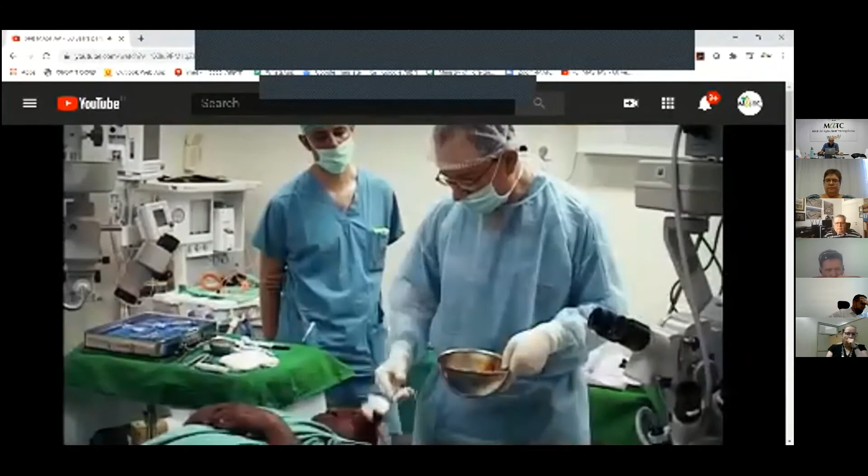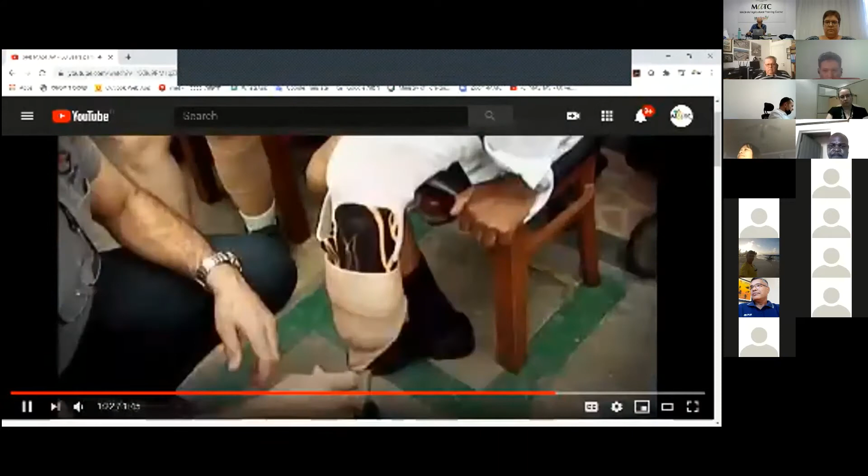Mashav, Israel's Agency for International Development Cooperation, was launched 60 years ago to share the know-how and technologies which provided the basis for Israel's own rapid development. Mashav aims to empower those living in poverty in a holistic and innovative way and support fellow nations and communities in their struggle to achieve sustainable development, placing people at the heart of its initiatives. Our agricultural programs use unique techniques and farming methods to increase sustainability, food security, and hunger eradication. We believe that investment in education is an investment in our future and an agent for change around the world. We coordinate Israel's official humanitarian assistance, building medical facilities and supplying medicine in the wake of earthquakes, floods, famine, and other disasters. Mashav promotes innovative entrepreneurship as a means of advancing growth and prosperity. We believe that gender equality and women's empowerment are central to reach sustainable development. Our philosophy is to leave no one behind. During 6 decades, Mashav has trained over 300,000 people from more than 140 countries and has established development projects worldwide. Mashav, Israel's Agency for International Development Cooperation, is celebrating 60 years of sharing its experience and partnering for a better world.

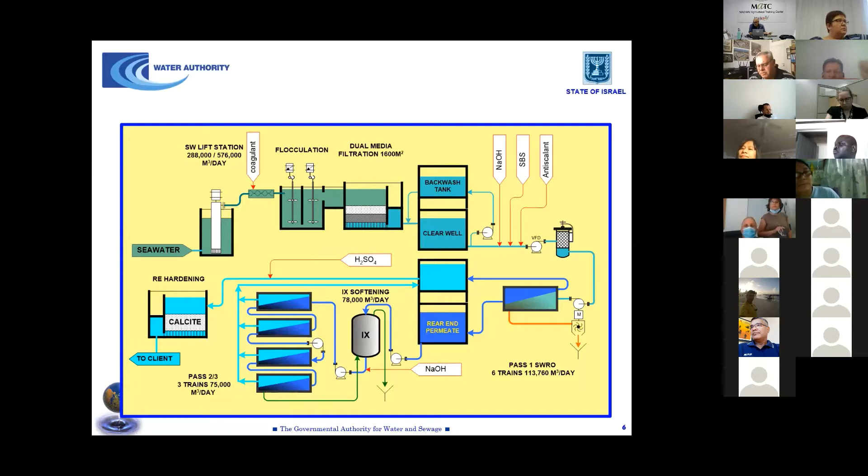Now, what are we doing? We are doing three things in parallel. The first thing is saving water, and I will touch on different kinds of water saving that we are doing in Israel. The second thing, we are reusing water. We are taking our municipal wastewater and using it as a water resource. And this water resource is a constant resource. We have it all year long, and it's only growing with the growth of population.

And the third thing that we are doing is desalination. It means producing new sources of water from resources that you cannot use directly, and you need to do all kinds of purification in order to get the molecules of water that we need.

So going into the water saving, there are several things that we are doing in this matter. One thing is publications, all kinds of PR, all kinds of promotions in TV, radio, newspapers. This is a thing that we are doing all the time, letting our people know that we will always have a shortage of water and we need to save water all the time.

The second thing that we are doing, we are teaching the children in our schools. We start with our kindergarten children, elementary school children, but we are doing also a lot of work with our students. It means all the pupils in Israel are getting a kind of a brainwashing on the water issue, trying to teach them really to save water.

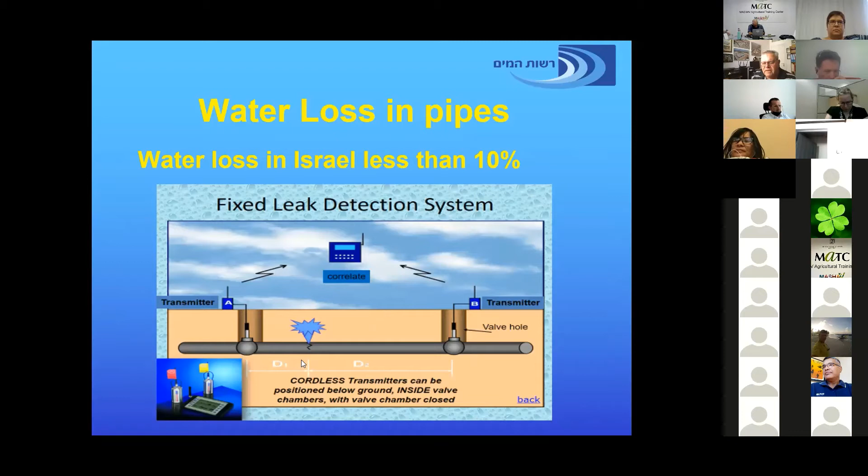The way that we try to define the leakage in pipes, there are very interesting technologies, part of them developed by Israeli companies, in order to define the leakage immediately when it happens. It means that you are able to correct, to maintain the piping system immediately when you have a leakage and save a huge amount of water.

And about the water tariff, this is a very important thing. What is important with the water tariffs: in Israel, we are using two levels of water tariff. We are using a lower level for the poor people that cannot afford to pay too much for the water, and we are using a higher level for the people that have more than enough money in order to pay for the water. So the whole matter of the water tariff is, again, very important.

And the prices in Israel today are about $2 per cubic meter, up to $3 per cubic meter, and the agriculture is paying for their reused water about $0.4, $0.5 per cubic meter.

Now, going into water reuse. Water reuse is very important in Israel. We started with it almost 30, 40 years ago, when we understood that we are not going to have enough natural water for our purposes. And on the other end, we do have municipal wastewater that we can use. So we started to treat the wastewater and reuse it in our agriculture. This started with an amount of about 100 million cubic meters about 30, 40 years ago.

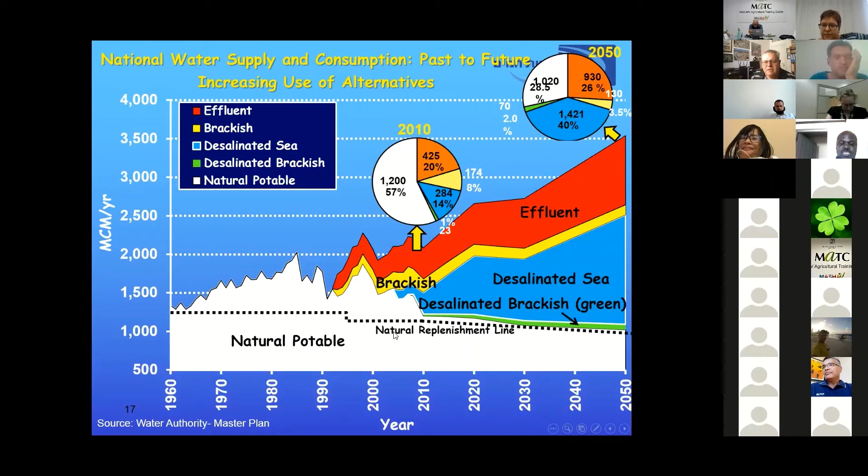Now, by being a country that has a huge deficit of water, we also developed very interesting technology in Israel. I'll not go too much into it, but if you are looking into water saving systems, water leakage detections, water security, which is very important, smart cities, and national water management, a lot of technology like this we do in Israeli companies, and they will be more than willing to assist each and every one of you with this

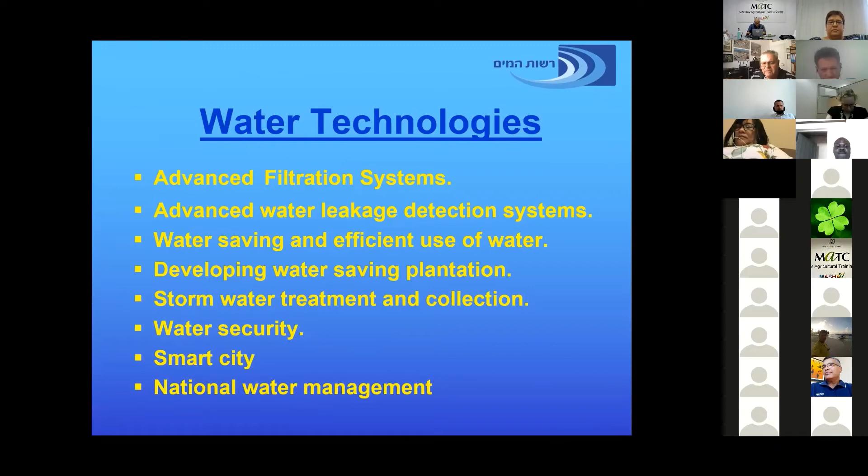matter. Now, after we talked about water saving, we talked about water reuse, we are going now to deal with the last part of the presentation, which is producing new means of water, and it's called desalination. And for desalination in Israel, we base ourselves on two resources. One is brackish water or aquifer water that we have, underground water, salty water that we cannot use directly, and we need to desalinate it to take out the salt from the molecules of water. And the main resource is seawater, and the desalination of seawater is our main resource of desalination in Israel.

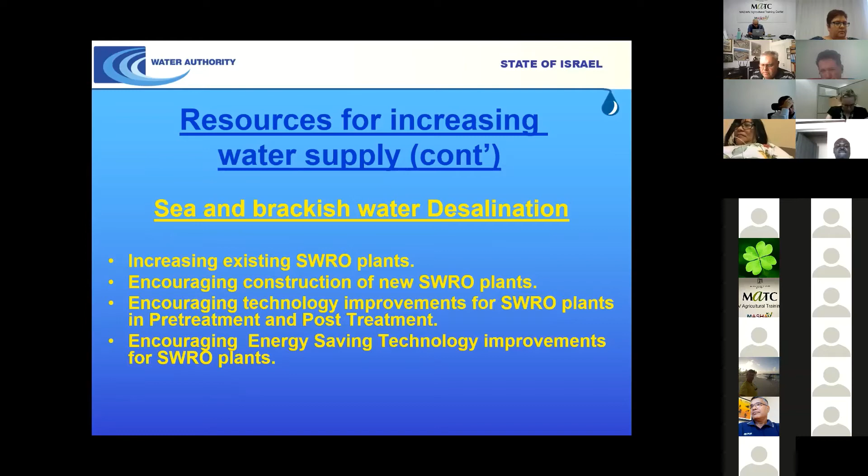To be able to desalinate water, we need to have a national program that will let us keep land for new developments of desalination plants into the future. And we do have a national master plan. The old one was a master plan that allowed us to desalinate up to almost 800 million cubic meters per year. Just a few years ago we finalized a new master plan that allows us to desalinate more than 2 billion cubic meters per year. It means allocating new places for new desalination plants. So this is a very important thing that we need to have in each and every country that goes into desalination, to define the places that you want to have desalination in the future.

I will just say one word. The price of desalination in the world is going down. If, let's say, 20 years ago the price of desalination was about $2 per cubic meter, we succeeded now in Israel to reach numbers of almost 50 cents, almost $0.50 per cubic meter of desalinated water. And it means that we are now very close to the price of just producing natural water. So desalination is not as expensive as it used to be, and we can allow ourselves to have desalination in most of the countries in the world now. So this is very important to know.

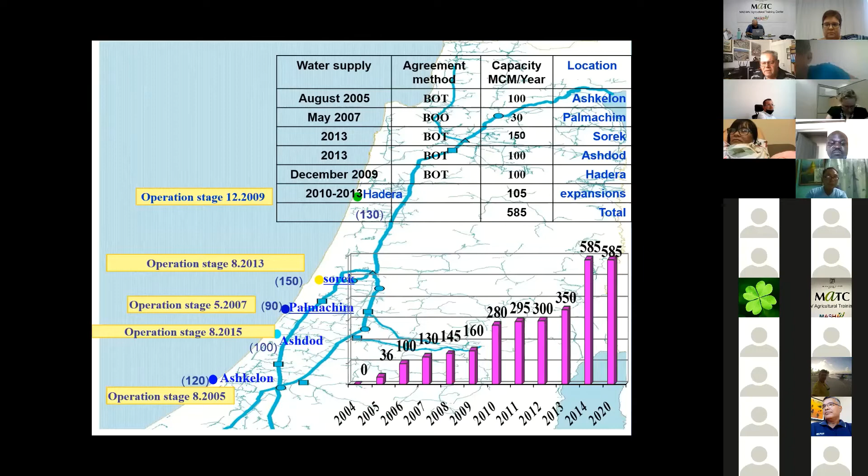Now, just a word, as I promised you, about the technology. The reverse osmosis technology, which is called the new technology, is about 50 years old. It started with a Jewish professor who started his research in California, Professor Sidney Loeb. He's really the father of this technology. He also gave the name reverse osmosis to this technology. Professor Sidney Loeb came to Israel as a new immigrant in the late 60s, and I was fortunate to be one of his first students in Israel with this really new technology. Today most of the desalination in the world is reverse osmosis, because this technology is cheaper than the old thermal technology.

Now, going back, after we desalinate the water, we need to send the water everywhere in Israel. So we do have a national grid. You can see these blue lines, like blood veins all over Israel. It means that we can send water from each and every place to each and every place in Israel. You can also see some red lines, and this is the piping system of the reused water in Israel. So we have a huge piping system of natural and reused water all over Israel.

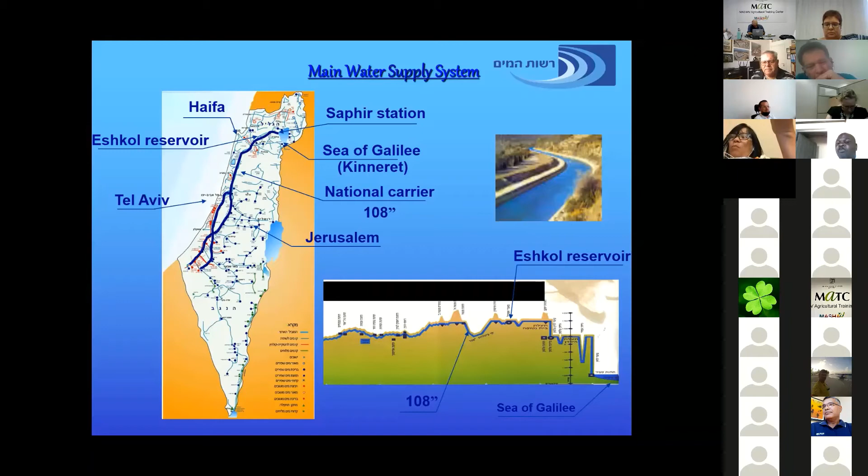You also need energy. In order to build and produce more desalination plants and more wastewater treatment plants, we need energy. And Israel is basing most of its growing energy on new and sustainable units. Part of it is using more and more natural gas units, going into solar energy. We just finished our third large-scale solar power plant in the desert. We are going to build much more wind energy in Israel than what we have. We also have what is called pumped storage. I'm not going into it, but most of the increase of energy in Israel is going to be sustainable means of energy.

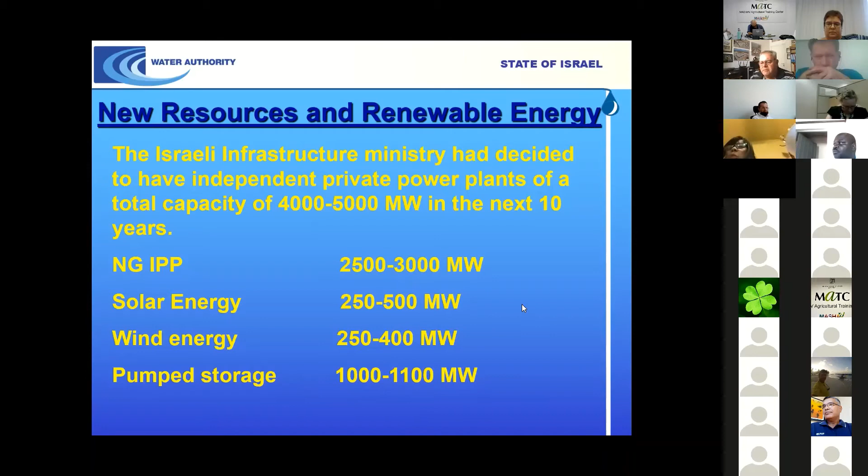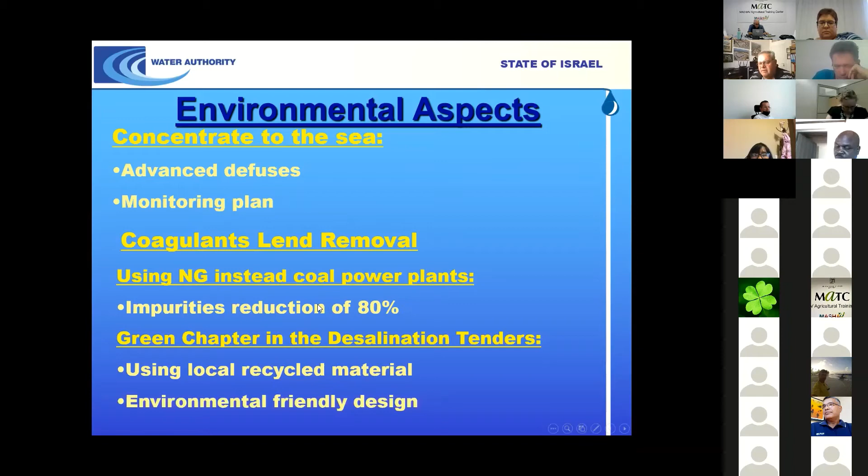And just going on to the environment, of course, when you are building so many desalination plants, you need to keep the environment as happy as possible. So we need to bring down the influence of these plants on the environment. We are doing many things in this matter in order to protect the environment and keep the environmental people and the NGOs at least happier than they are today, and still be able to produce water.

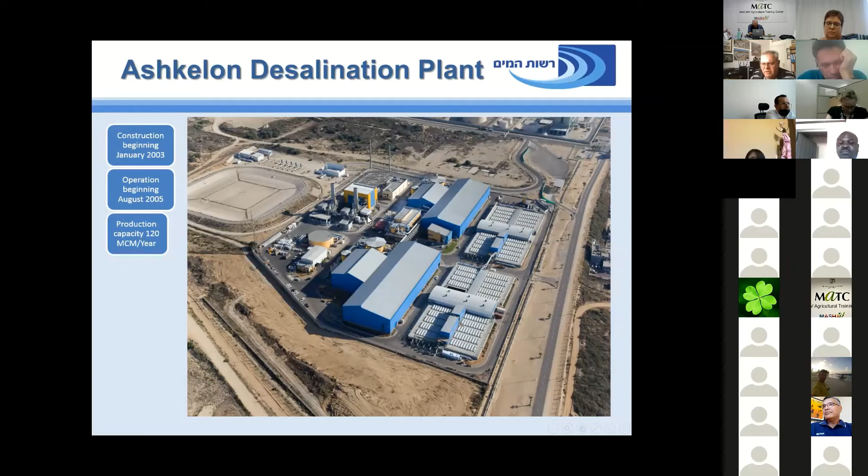And just to show you the plants that we have today, you can see the Ashkelon plant. It started at 100 million cubic meters per year, producing today 120 million cubic meters a year. The water goes into a closed pond. The water is below the surface that you see here, and it is pumped into the national grid. About 5 kilometers south of here is the Gaza Strip. So this is the Ashkelon plant, the first one. The Ashkelon plant has its own power plant fired with natural gas, so it's a completely independent plant. Then you have the Palmachim plant, about 15 to 20 kilometers south of Tel Aviv.

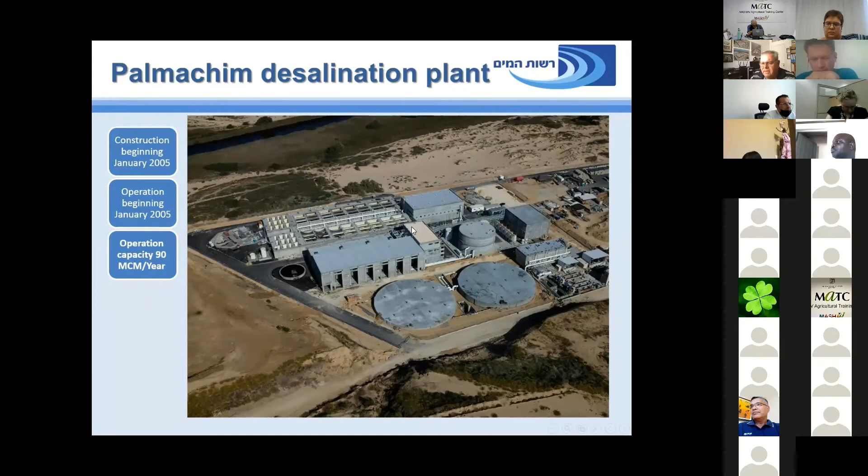It started at 30 million cubic meters per year. Today it's producing 90 million cubic meters per year. It tripled its capacity of desalination. The third one, the Hadera plant, you can see this is the plant, is producing today about 130 million cubic meters per year. And if it's needed to use its full capacity, it can go up to 140 or 145 million cubic meters per year of desalinated water.

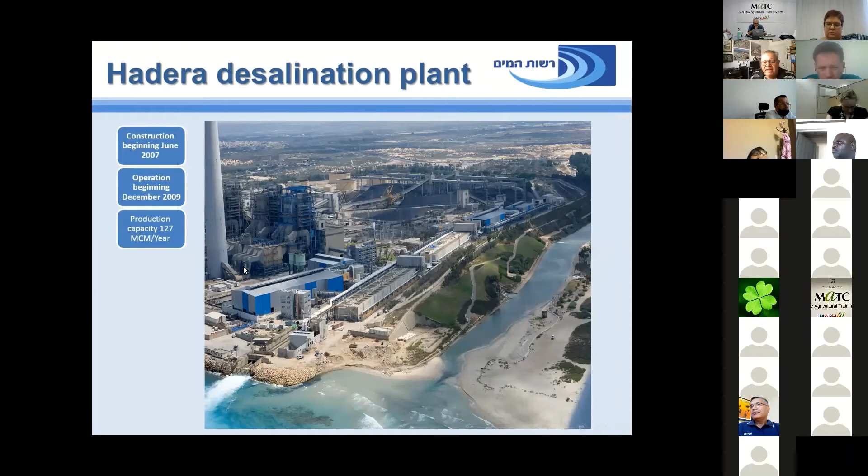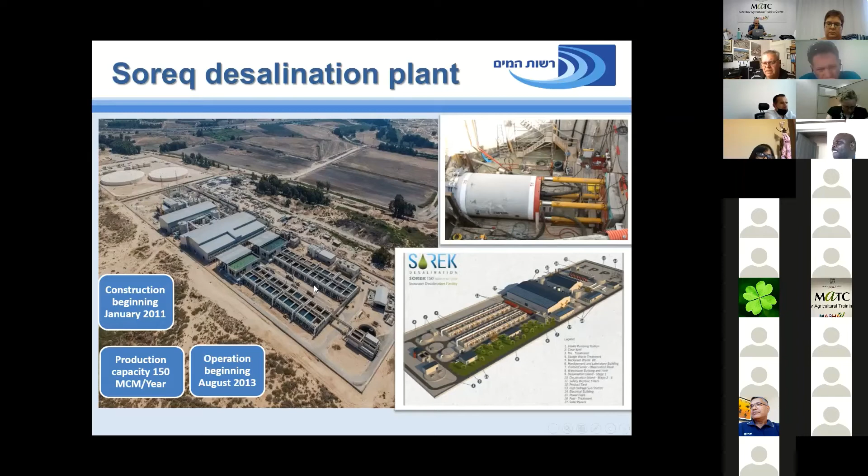And the Sorek plant, which is today really the largest reverse osmosis plant in operation, is producing 150 million cubic meters per year. But if we need it to produce its full capacity, it can go up to 170 million cubic meters per year. And this is also about 20 kilometers south of Tel Aviv, about 2 kilometers from the Palmachim plant. And number 5 is the Ashdod plant, which started its operation in 2015, producing about 100 million cubic meters per year, about 30, 35 kilometers south of Tel Aviv.

So these are the 5 large-scale desalination plants that we do have today. And we are now starting to build number 6, which is going to be next to the Sorek plant that I told you about. And number 7 is going to go into a tendering procedure, let's say in about a year from now, in the northern part of Israel, a plant that's going to be 100 or 150 million cubic meters per year. As I told you, every few years we will need to build a new desalination plant in Israel.